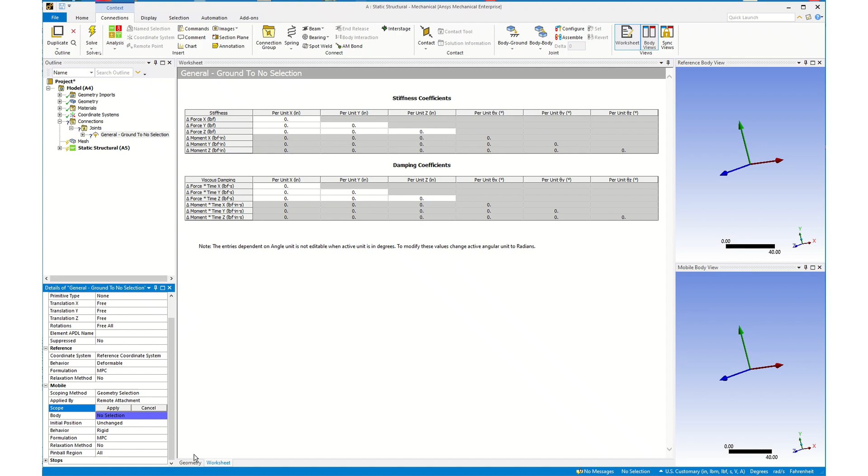Now I need to scope and select the face that I want to put this joint on and where I want to know the angle of twist. So I'll click on the yellow no selection, and then this has come up based on my joint. To get back to my model, I need to come down here and click on geometry, and that will bring up my geometry, and I can come up to face select, select this face, come over to scoping and click apply, and I now have my one face on my solid body.

The other thing that I need to change now is the behavior here, and I need to change that behavior from rigid to deformable as well. Now to see the rest of the list, I can come here and click and slide this window up a little bit. Now I can see the entire details for my general joint.

And I just double check. I got a body to ground. I got a type general. I've got all my conditions set here as free. I have a deformable behavior. I come down and I have my one face selected, and under mobile behavior I have deformable selected as well. So that's what my joint needs to look like.

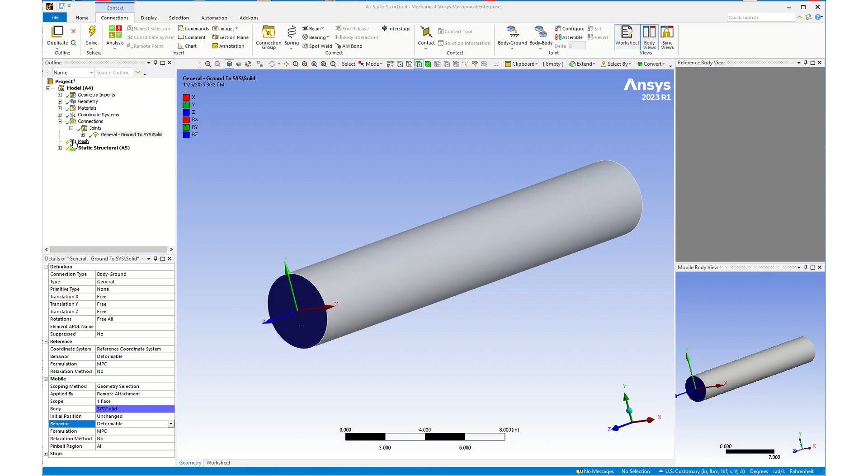So now I will come over to mesh, and I'll click on mesh, and I actually want to change the resolution here. I've changed it to 7 so that I have a high resolution, and I'll go ahead and click mesh and then generate. This will take just a second because that will be a dense mesh.

For the boundary conditions that I need to apply, I'll come here to static structural, and I have a fixed support on this end, and then on the free end I'm going to put a moment. So I click on moment. I have it on the one face. I have a moment of 1,000 inch-pounds about the Z axis, and you can see that the torque is being applied to the free end. So I have my settings there as I need them.

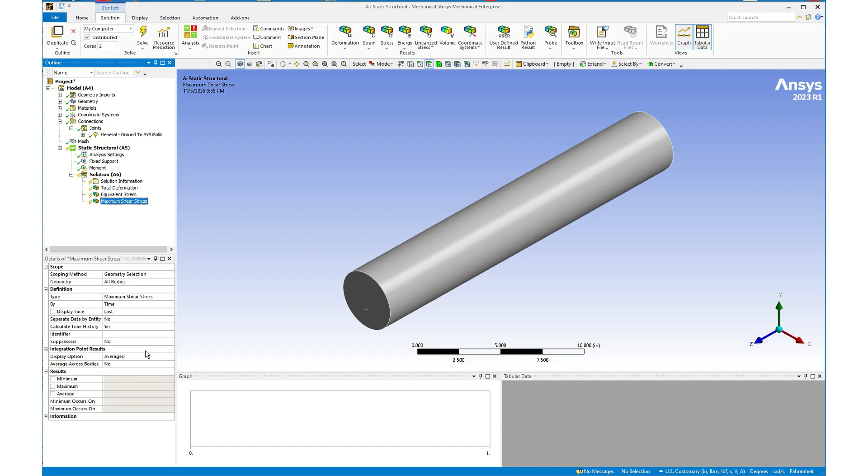Now I can come to solution, and I've added a total deformation on all bodies. I've added an equivalent stress on all bodies, and I've added a maximum shear stress on all bodies. I want to make sure that I can get the angle of twist, so I need to add the joint.

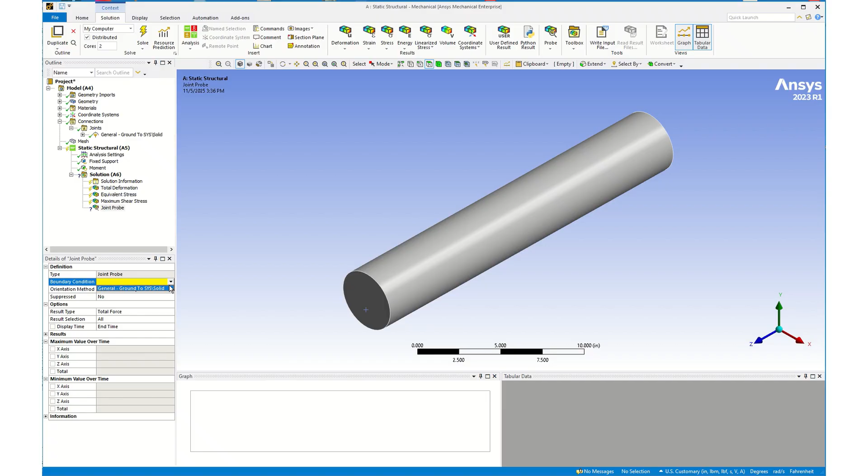So if I come to solution and right click on it, I can insert a probe, and I'm going to insert a joint probe so that it will tell me the information at the joint that I have on the end where I want to know the angle of twist. I'll come over to boundary condition. I only have one boundary condition in my model, so I choose that boundary condition.

The other thing I need to change in this model is I am not looking for a total force result type, but I'm looking for a rotation. So I'll click on the box, click the drop down, and you actually have to scroll down to get to rotation. So I'll have a relative rotation as my result type. I now have everything set here.

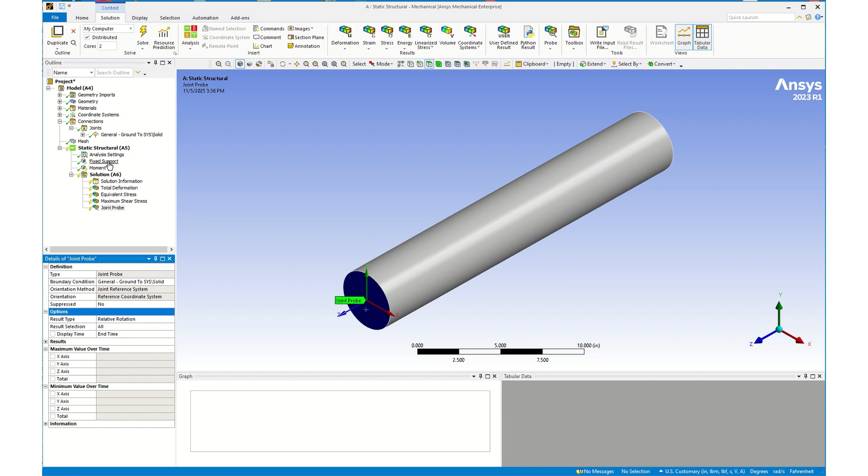I can just double check my model. These are all the outputs I want. I have my fixed support, my applied load, and I have my joint, so I'm ready to hit solve. Now that my model is solved, I can click on the results. I can see the total deformation. That makes sense that there's 0 back here, and it increases as I come to the free end.

I can look at the equivalent stress, and over here I can see that the magnitude of the equivalent stress is 138.32. I can also see that up on my color scale up here. I can look at the maximum shear stress. My maximum shear is 79.86. Now I can look at my joint probe, and coming over here I can see that the relative rotation for my joint probe is 4.9e-3. And that's the relative rotation about the z-axis.

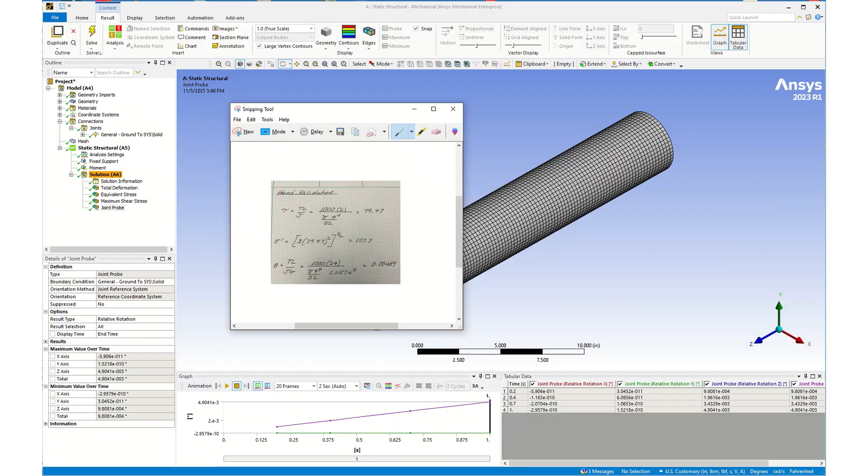I have done the hand calculations, and these are the results that I have attained. So back to equivalent stress, we had 138, and that's the same value that we were able to compute with the hand calculations. So that verifies the results. Hopefully this video has been helpful in showing you how to compute the angle of twist using ANSYS Mechanical.